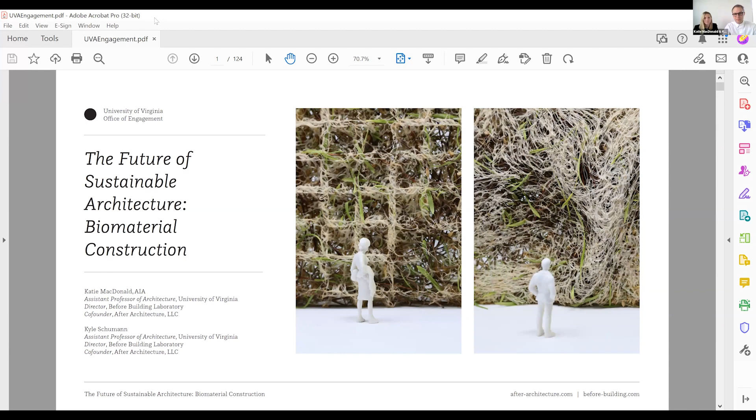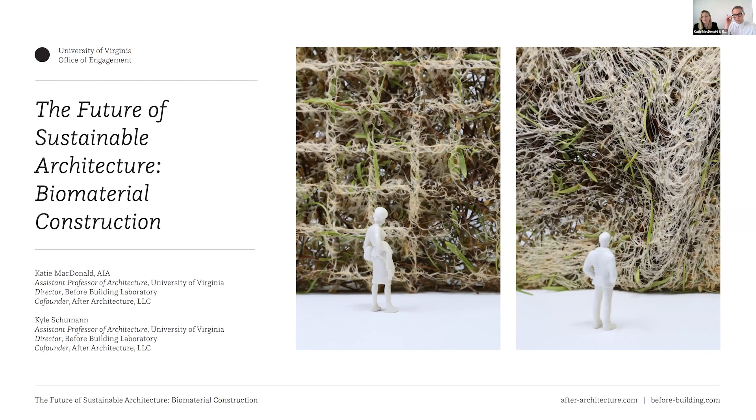As Woody mentioned, I'm Kyle Schumann. This is Katie MacDonald, and we're happy to join you from the School of Architecture, where we serve as assistant professors. We're particularly excited today to share with you a body of work that we've been developing for a while, which leverages material properties to make sustainable buildings. Specifically, our work aims to address the built environment's contribution to global carbon emissions by creating material assemblies from renewable materials that sequester carbon.

So outside of our appointments as faculty at the University of Virginia, we run the professional practice After Architecture, a studio named to convey the built environment's impact on cultures and ecologies. Through this practice, we've completed permanent works ranging from furniture to public art installations. So here you see a variety of those earlier projects. We've always been interested in making things physically and thinking about the materials that are used to produce our work. We've also completed permanent works at larger scales, including a public memorial in Washington, D.C., a mountaineering shelter in Europe, as well as private residential projects.

As a complement to our professional practice, we co-direct an academic research lab at the University of Virginia. The Before Building Laboratory pioneers new material assemblies to advance circular construction practices. Working with a team of paid student research assistants, we leverage new technological advancements that enable us to work with natural materials in new ways.

This work often takes form as a combination of small material prototypes, material testing, and demonstration assemblies. While small-scale investigations, they have large-scale implications with the potential to disrupt global reliance on concrete and steel as primary structural materials. The work we present today will include building projects from our practice, as well as material research from our labs.

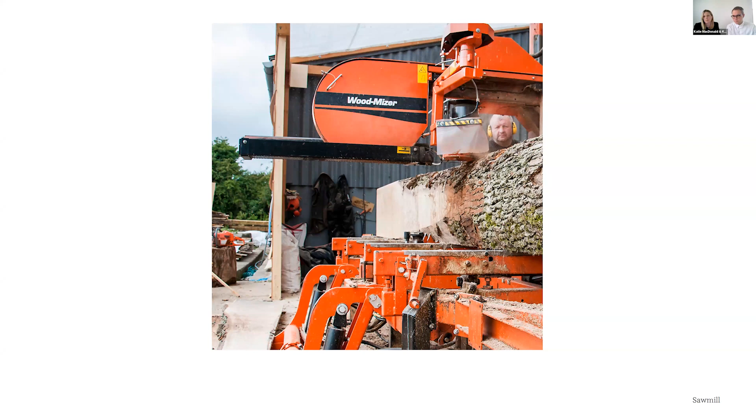To break wood down into a uniform element produces waste and consumes energy in the production of what is still essentially a raw material in terms of building production. Through this process, the intelligence of the grown material is lost, so we trade greater embodied energy and waste for ease of construction on site. The humble 2x4 is optimized not for material economy or material intelligence, but for human labor and speed of construction.

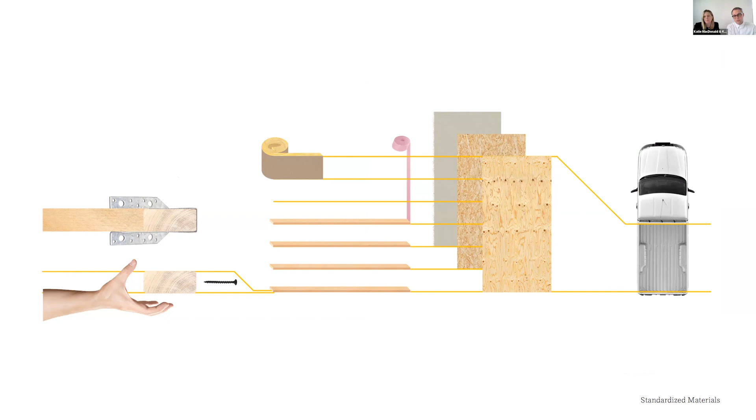So this exhibition created a blatant association between the industrial materials and processes used to produce those materials and the modern design that the materials produced. And it was neatly packaged for consumption by a public audience meant to describe the relationship between these materials and modern architecture.

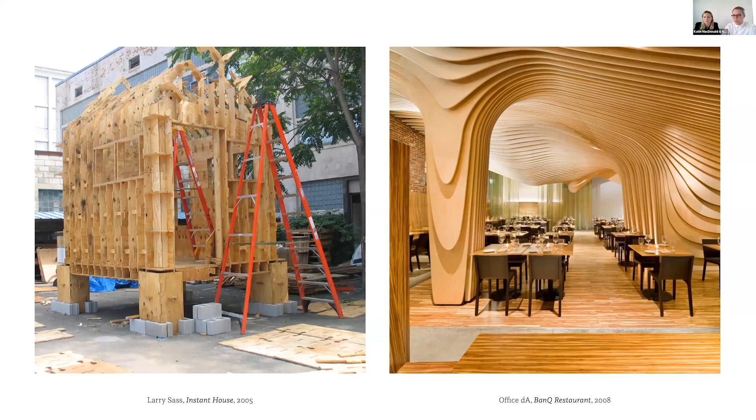The introduction then of computer-aided design brought the potential for more economical applications of custom forms in construction, while extending and reapplying subtractive methods to now create custom form from standardized material. So you're still taking the intelligence of the tree, simplifying it into boards or sheets of plywood, for example, and then reprocessing it through digital fabrication methods to produce sort of custom forms in variable architecture.

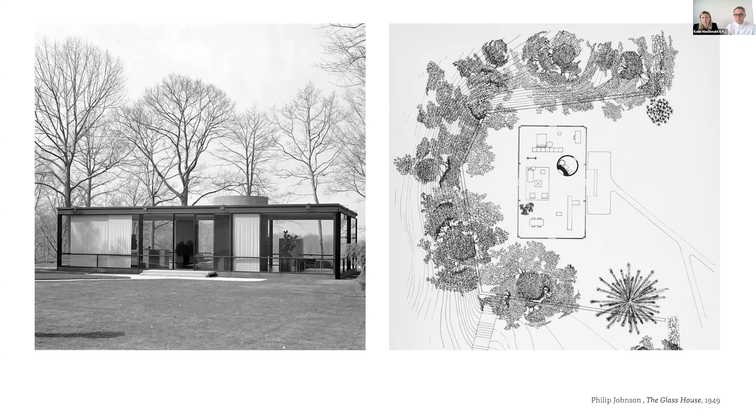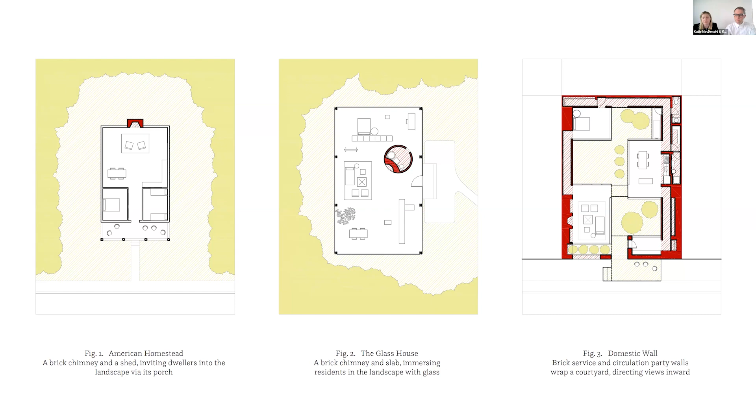The American approach to domesticity has long favored informal conditions, sheds in the landscape, from the original American homestead archetype to Philip Johnson's brick, slab, and fireplace ensemble. Today, increasing resource scarcity, impact concerns, and the growth of cities necessitates a single-family dwelling type that can accommodate greater density, use passive methods of environmental control, and promise Americans the access to nature that they crave, while dislodging the assumption of and desire for a sprawling yard. So the resulting dwelling type accommodates greater density, uses passive environmental control, and promises access to nature.

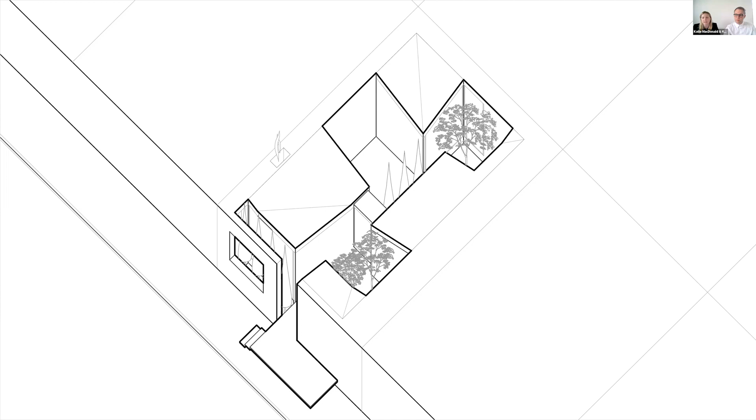Inverting Johnson's centralized brick service core, Domestic Wall allows for the neighboring wall between properties to become thickened and house programs such as bathrooms, fireplaces, storage, and frees up the central space of the lot as a courtyard. The building's brick perimeter absorbs solar heat during the day to keep the building warm at night. From the street, passersby glimpse a garden through an opening in the wall.

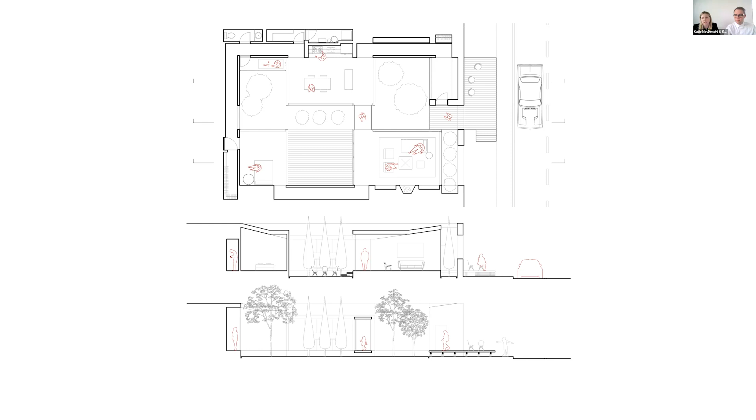A wooden porch slides out, hugging the sidewalk and providing a perch from which occupants can survey the street, engaging in neighborly camaraderie. Inside the wall, circulation snakes between pipes, services, and storage. Dwelling spaces line the garden and exchange glances through the filter of the lush planted space that lies in the middle, the courtyard. Next, we'll move to tactic 2, material treatment.

Located in Northwest Washington, D.C., the Camp Barker Memorial responds to the landscape of American monuments that valorize performance in battle, instead taking form as a series of spatial markers which convey a complicated history. The memorial was designed and commissioned in early 2017 and completed in 2019, a period in which the role of Civil War monuments was being reconsidered. The project advocates for the significance of counter-narratives. The Camp Barker Memorial answers a brief for the design of 3 entry gateways to an elementary school, by framing and revealing the site's history as a Civil War era contraband camp.

A typology specific to the Civil War, the contraband camp came into being as a Union establishment, where those escaping slavery sought refuge from Southern enslavement. Initially constructed as Union barracks, Camp Barker later became a contraband camp. Residents experienced cramped, poorly ventilated spaces, food and clothing shortages, and poor sanitary conditions, working for meager wages. However, occupants also gained access to education and religious gatherings.

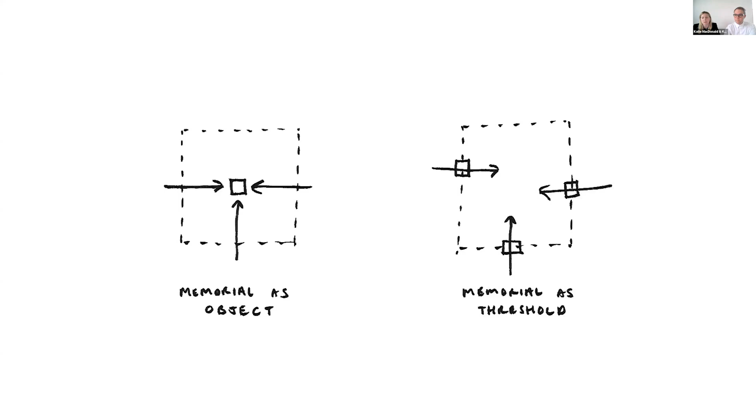In the aftermath of the war, the site gave birth to a longstanding African-American community just blocks from the heart of the Capitol. The Camp Barker Memorial takes shape as a series of thresholds integrated into the fenced perimeter of a public elementary school. The site, which encompasses an entire urban block, is bounded by the linear school to the north, while fencing on the east, west, and south sides encloses the school grounds. The grounds also double as a public park.

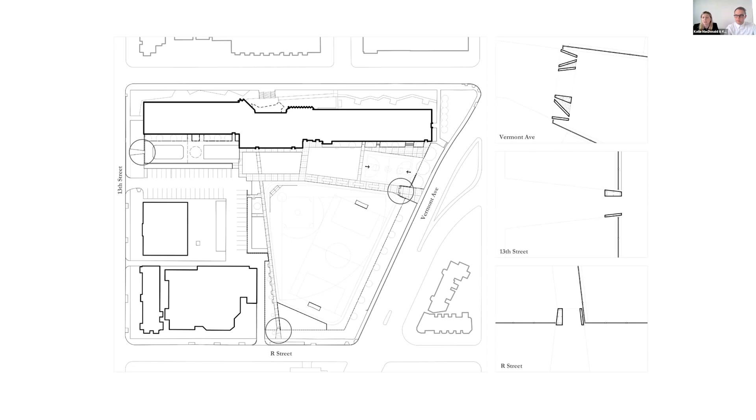The memorial portals introduced in this project simultaneously address the history of the site and its recreational grounds. Intervening in each of the 3 fenced elevations, the memorial takes the monument off its pedestal and puts it at eye level, physically and visually accessible to the public, a series of thresholds that visitors must pass through to enter the grounds. The entry portals recall the informal timber buildings of Camp Barker through wood-clad structures that allow for passage

and shading. A continuous folded plane forms each portal's floor, walls, and roof. On the playground side, smaller side wings create habitable spaces that engage the scale of the child. A liner of brass invites reflection and casts a warm glow. Standing within the portal and looking into the brass surface, one can view the outline of one's own reflection and surrounding colors, a kind of visible ghost that removes personal identity in favor of a shared human condition.

In contrast to the white marble monuments that define Washington, D.C., the exterior surfaces of each portal are clad in charred wood, a finishing technique which fortifies the material against UV, fire, insects, and other environmental agents. Integrated into this palette are a series of narrative bas-relief sculptures by artist Vinnie Bagwell, which more overtly convey the site's themes. The recessed sculptures, cast of blackened bronze to match the wood, are set into the thickness of the folding portals and depict key figures, moments, and texts in African-American history.

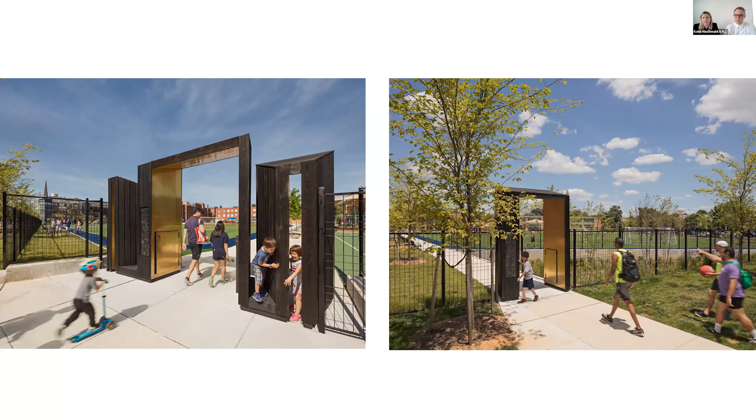It is contrast that makes the memorial a critical part of the elementary school campus. Present-day students may daydream of the children that learned on these grounds a century and a half prior, confronting the promise of emancipation, but a long road to equity ahead. That fight is visibly ongoing, and the memorial a reminder of what is at stake.

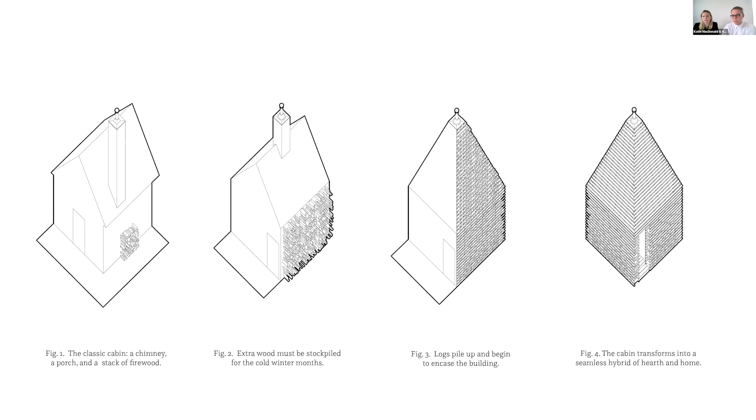We'll move on now to tactic 3, off-grid, and talk about a project we call Hearth, which is a backwoods cabin sited in a kind of remote wooded site in Orwell, Vermont. So in starting the project, we were interested in engaging with the cultural memory of a cabin. What do you think of when you think of a log cabin? And we identified a series of elements: the chimney, the porch, the stack of firewood, and distilled those components of the classic backwoods cabin and rearranged them into a kind of seamless exterior. We think of it as a domestic chimney. So Hearth hybridizes all of these elements through a series of layers as you move from the outside to the inside of the structure.

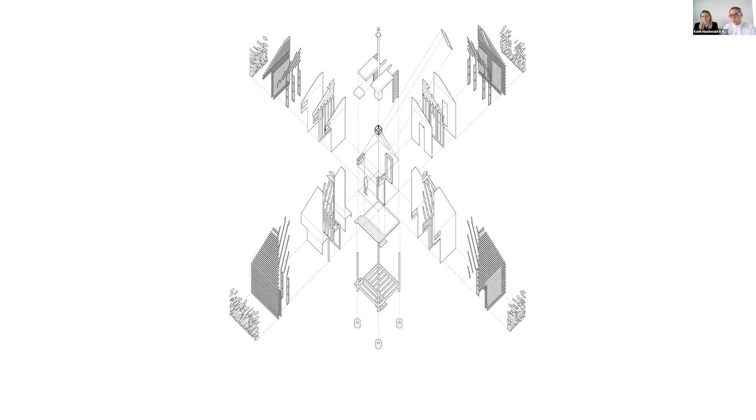Contrasting the vertical timbers of the surrounding woodlands, the building takes form as a horizontal layering of lumber from the slatted facade to the logs it stows. Here you see an early rendering of our ideas for the project, in which you can see this deep rain screen facade system, which allows the storage of firewood to happen seamlessly around and across the faces of the building, in contrast to the woods that surround the site.

Our next tactic moves on to living material, and we'll share a couple of examples. The first is called Grow on Me. It's a table that integrates plant life into the everyday rituals of working and dining. A series of flower pots are nested into cylindrical table legs, giving the illusion that they've been extruded directly from the floor and merging the pot of the plant with the surface of the table.

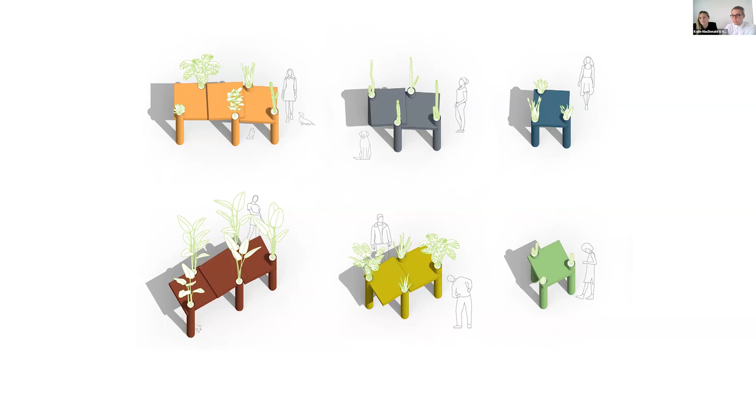The round geometry of the legs supports a collection of square tabletops, allowing them to pivot from one another and dislodge traditional seating layouts. Grow on Me supports a range of activities, and its cast of botanical characters influences both the appearance of and experience of the table. Vegetation height, variety, and geometry allow for various scenarios, including foliage screening or a shared canopy to join occupants sitting around the table. It's finished in a creamy terracotta in a nod to the traditional materiality of flower pots.

So they're manipulated throughout growth to shape the direction of the gravitropic roots of the barley and the heliotropic sprouts. So the roots are growing in relationship to gravity, the sprouts are growing in relationship to light, and we can control those different aspects of the system to help collaborate with the plants and control the nature in which they're growing together.

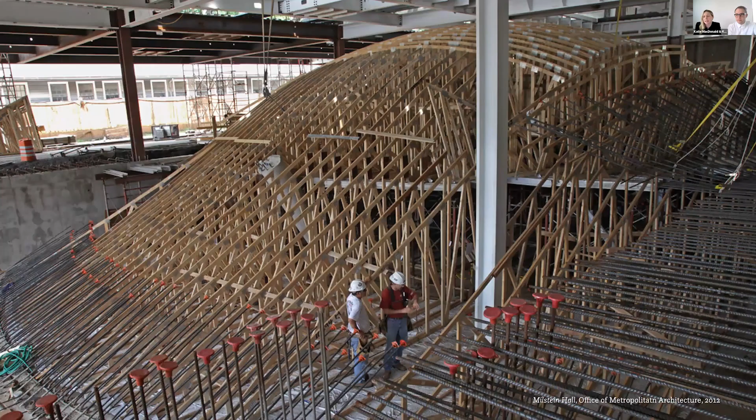The next tactic, 5, focuses on materials which are local and abundant. The use of material which is local and abundant is central to the construction and composition of Homegrown, a project exhibited at the Knoxville Museum of Art. The first material input for this project is air. Construction formwork is materially intensive and expensive, often resulting in wasted materials, including spent lumber and spent foam. Such waste can proliferate in the construction of customized digital forms in which each mold's geometry is specific to a surface and can therefore only be used once.

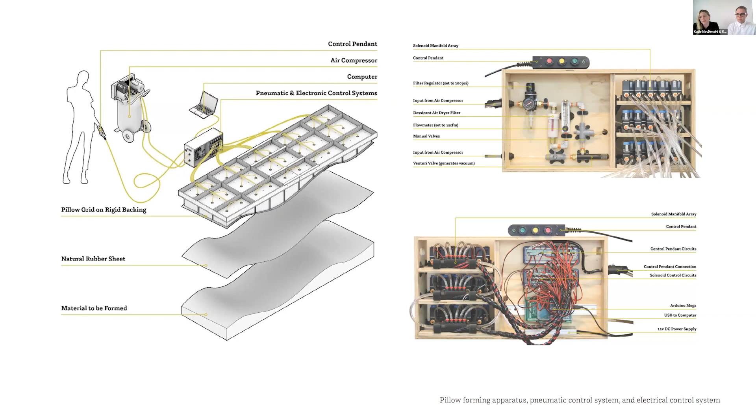This technology, which we developed for this project, pillow forming, leverages the abundant and globally available air to create an adaptable system that allows the surface geometry to be highly controlled via a digital workflow, eliminating the use of wasteful single-use molds. The machine consists of a rigid plywood surface and a grid of 1-foot cubic inflatable pillows made of vinyl that can be inflated individually. The flexible top surface of each pillow is attached to neighboring pillows, such that when they're inflated to different heights, they create a single and continuous surface, against which material can be cast or formed.

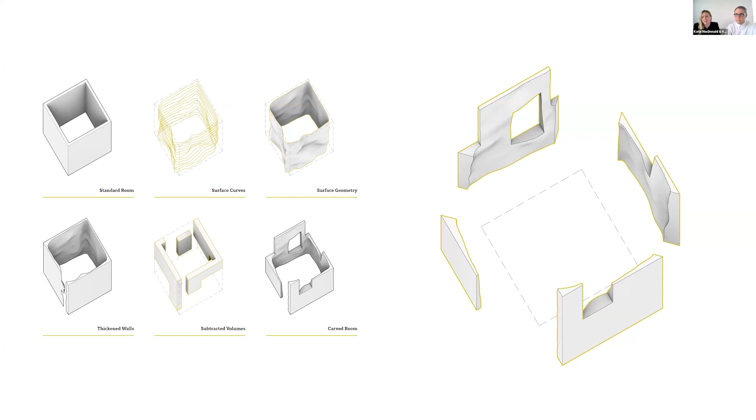The second material that we'll look at in this project that's local and abundant is invasive species. Homegrown expands the inventory of grown construction materials to species which are not cultivated and harvested, but in fact removed as an act of remediation. The project focuses on the poster child of invasive species, the vine that ate the South, kudzu. The installation entangles discrete parts, including kudzu, bamboo, and landscaping waste, into 4 wall panels, which form an exterior room. These panels are formed using the pillow forming machine.

Read alternatively as a ruin or a topiary hedge, Homegrown repositions the aesthetics of digital construction, replacing the smooth, crisp machine assemblies synonymous with the digital turn with an architecture that is fuzzy, fluffy, furry, or shaggy.

In this next project, the next local and abundant material that we're interested in is grass. In this project, we're working with colleagues Marek Pindera and Jose Gomez in engineering and Deborah Lawrence in environmental science to analyze material capacities and select grass species which will optimize carbon sequestration and minimize environmental impact. This project is funded as part of UVA's 3 Cavaliers initiative, which encourages work across disciplines.

After harvesting and evaluating various species as well as testing methods, we seek to develop applications for grass building components that marry the precision of industrialized paper tubes with the structural intelligence and flexibility of branching geometries. The resulting system has been piloted as a large-scale branching model, as well as small-scale prototypes, and has culminated in the construction of a single bay of a modular, full-scale structural system in which many bays could be aggregated to form a field, a structural field.

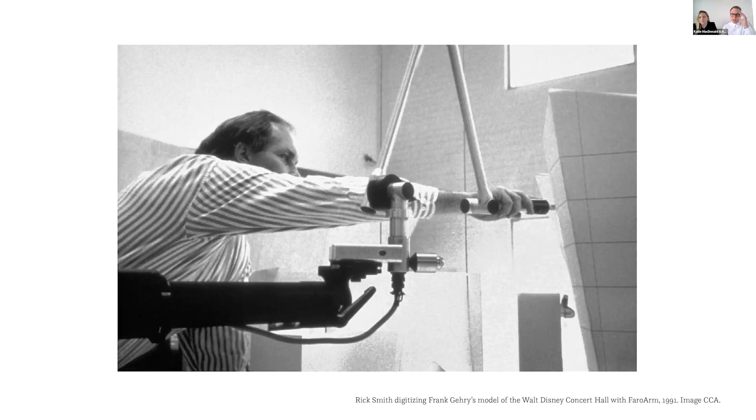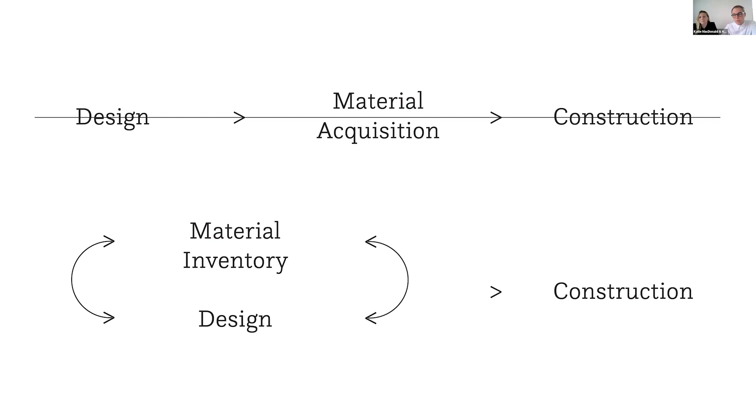So if traditional project delivery involves the creation of design documents long before material is ever acquired, these tools allow us the potential to leverage 3D imaging techniques to inventory material inputs, which will allow design processes to progress in dialogue with material, or to take the qualities of the material into account much earlier in the design process, not just at the end through the construction process.

So the first project we'll share in this realm is called Tangential Timber, which is a pavilion that pilots an application for nonlinear wood. Rather than cutting the wood lengthwise to produce boards, the project develops an application for cross sections of wood called timber cookies in the lumber industry. We didn't come up with this term, I wish we did, but the timber industry has all these amazing words for everything. So in this case, we're using cookies.

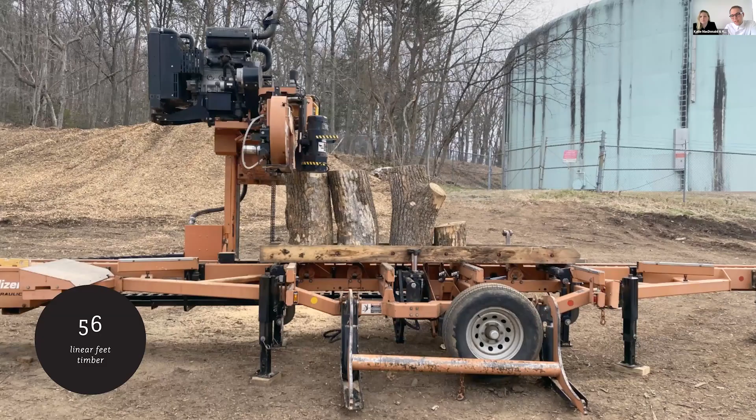The wood for this project was sourced from a campus stockpile of trees that were either felled by a storm, or cut down due to disease or due to construction projects on grounds. And we worked really productively with the group UVA Sawmilling that gathers this wood that you see here up on O Hill. And we sourced material from this stockpile working with UVA Sawmilling and facilities. And we cut altogether 164 cookies using a mobile bandsaw sawmill. And the cookies varied from about 3 to 5 inches thick, and they were in a variety of different species, just whatever waste material was available to us.

We then created a test assembly that consists of a compression vault. So we modeled this vault in the computer, and then we used various computational techniques to aggregate these cookies across that form.

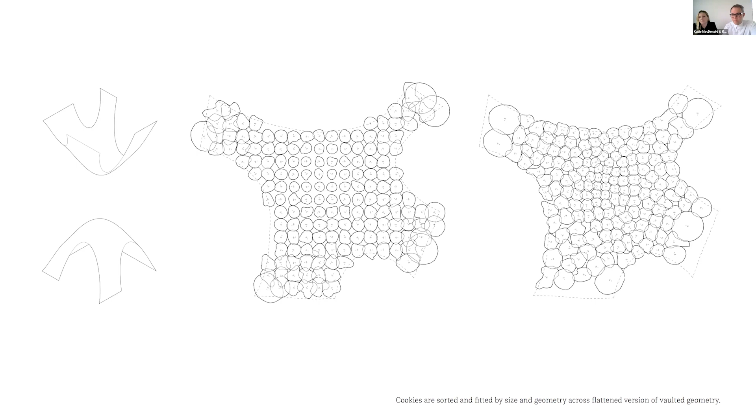Joinery was then cut with a 5-axis CNC water jet over in the engineering school. This sped up the fabrication process, meaning that we had to minimally cut or reduce each part and were able to produce these geometries. And it also limited our cut geometries to ruled surfaces. So it means we're cutting all the way through the material with this high pressure jet of water with an abrasive garnet in it that actually cuts through the material.

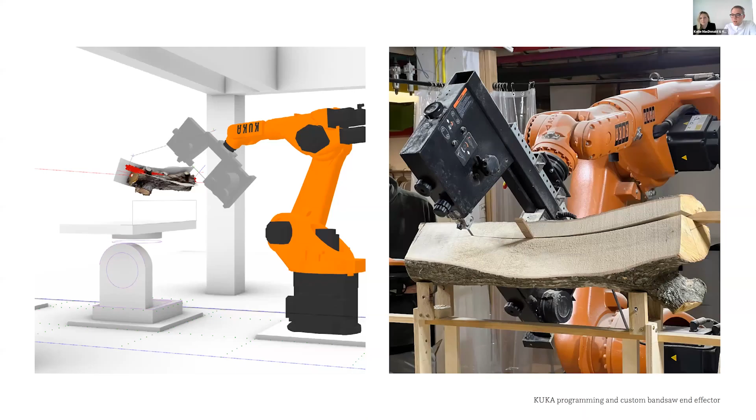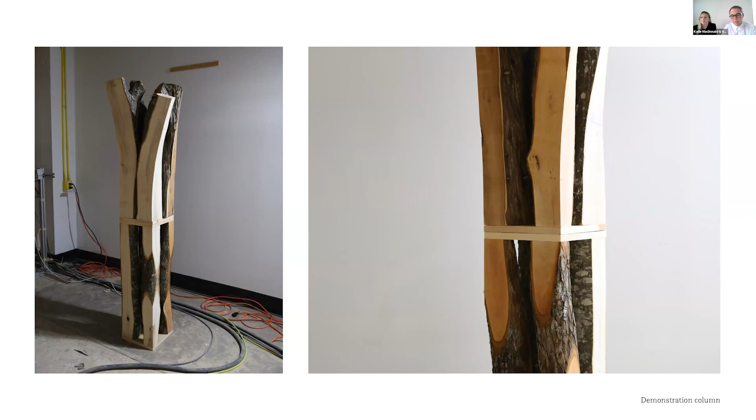We tested this approach by taking low resolution digital scans of a series of logs. This image is what you get as the representation of data that is then mapped onto a 3D form in the computer. And we mounted a commercial bandsaw to a robotic arm to test how we could cut this material in non-linear ways. The 3D scans were used to guide the saw's toolpath, making it possible to precisely mill nonlinear wood and open up applications for this global material stream.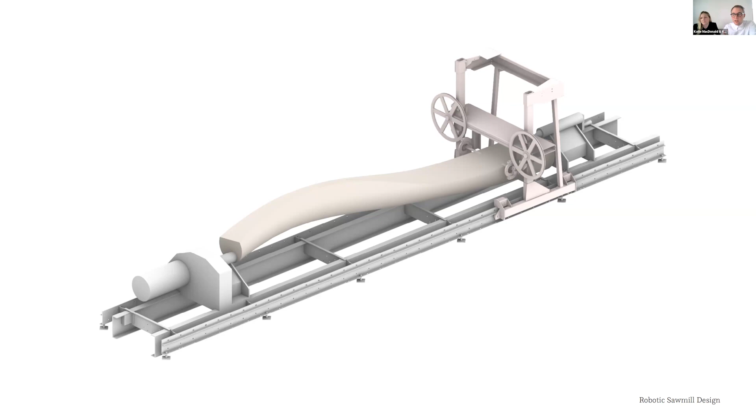At the same time, robotic arm systems are expensive, difficult to move. They have certain electrical requirements and other limitations. And so to democratize this workflow, we're developing a low-cost mobile robotic sawmill that will allow for widespread access to this tool to work with nonlinear wood and hopefully enable new species and new types of timber to be used.

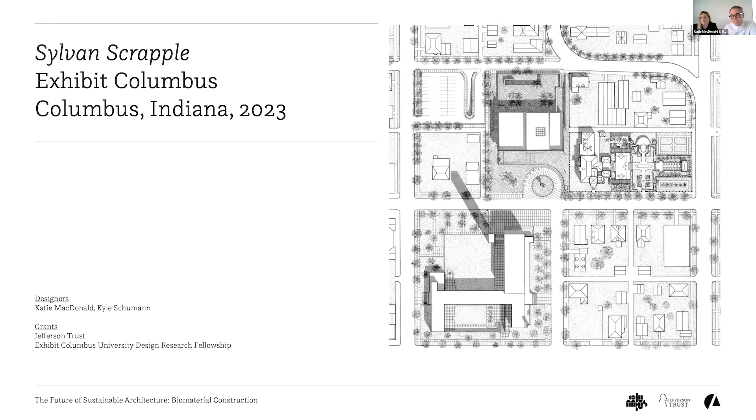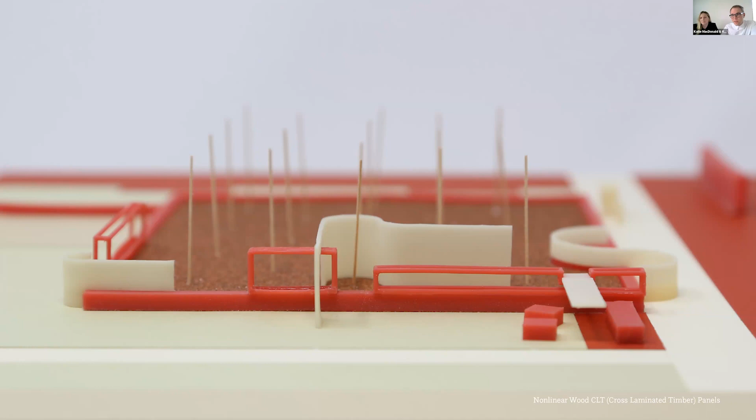The technology will soon be applied in the construction of an installation for Exhibit Columbus. We call this project Sylvan Scrapple, using a bunch of different sort of waste woods coming together. And we're planning to cut nonlinear wood using this custom robotic sawmill to composite it into curved panels and leverage the natural quality of the wood that's coming together. So this is a sort of schematic model of this installation that we'll be constructing this summer to install in Columbus, Indiana next August.

So we've reached our final tactic, which is dialogue. We believe that to make an impact, we need to work together. And to this end, we recently co-curated the Biomaterial Building Exposition at UVA, which brought together scholars advancing a radical material future. Since its inception, UVA's academical village has been an architectural testing ground. The exposition expands this tradition, forging a path towards a material future that foregrounds environmental and human health, set against the backdrop of a UNESCO World Heritage Site.

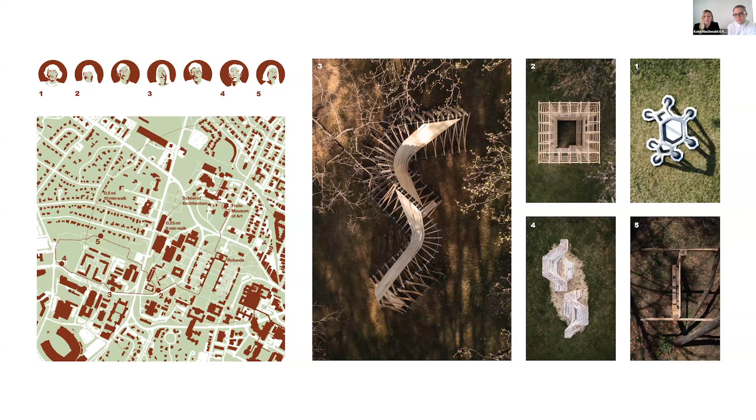Architects from 5 universities were awarded grants and worked directly with UVA students from across the university to develop and exhibit full-scale installations at UVA. So here you see a map of the 5 projects that were exhibited across grounds, all the way from arts grounds to the physics building and the first year dorms, and then a drone image of each of those 5 projects from above.

A gallery show, including contributions from the School of Medicine and School of Engineering, framed a larger field. And finally, a symposium in the Rotunda welcomed experts to grounds and created a venue for cross-university discussion on this radical material future. Key to this dialogue are the voices of the next generation who will champion the climate future in practice. In core coursework at the School of Architecture, students are advancing material research, and their work is already making an impact and being recognized by professional awards.

Architects today conceptualize and execute not just single projects, but also the systems, methodologies, and technologies that enable their production, with broad impacts on societies and ecologies. Leveraging this role, we hope to imagine and pilot a new material future. As this area is still emerging and there is much work to be done, we invite you to join us in this endeavor. Thank you so much.